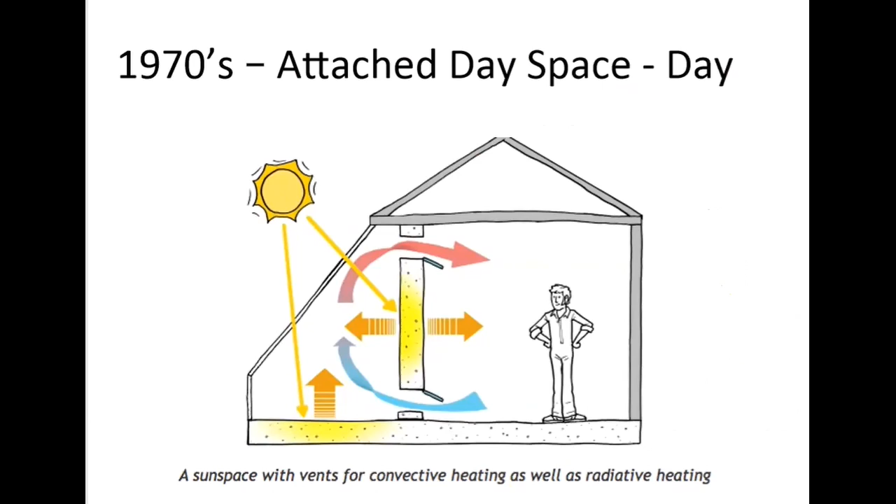One was this attached day space, commonly known as a sunroom, and this was an idea that came out of the 70s. I don't know how many people have seen this. You heat up a space during the day, and then at night, this heat that you collect in the wall radiates throughout the house.

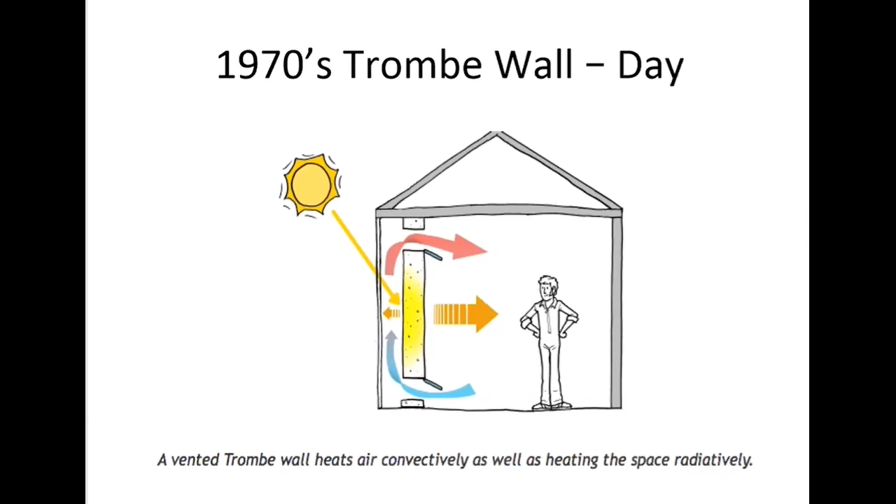We're going to be facing to the south. We're going to be berming as we can. Unfortunately, our site is reversed, but we've done a lot of work.

Putting the deciduous trees on the south, smaller north windows. One principle used very often is to have dark floors, like black slate. So when the sunlight comes in, it radiates and the heat is collected on the floor, and then you close the windows. I had one house that didn't even need heat at night—we collected so much energy in the floor and moved the air through the space. Another house we did in the Caribbean required no heating or air conditioning, all natural, but that's the Caribbean.

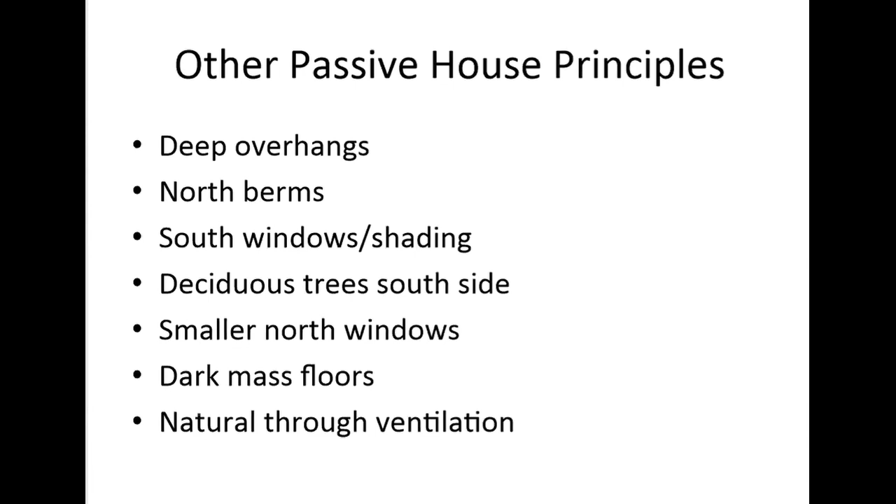So I'm moving quickly into the 21st century passive house. Compliments of Richard Pedranti—these are your five principles.

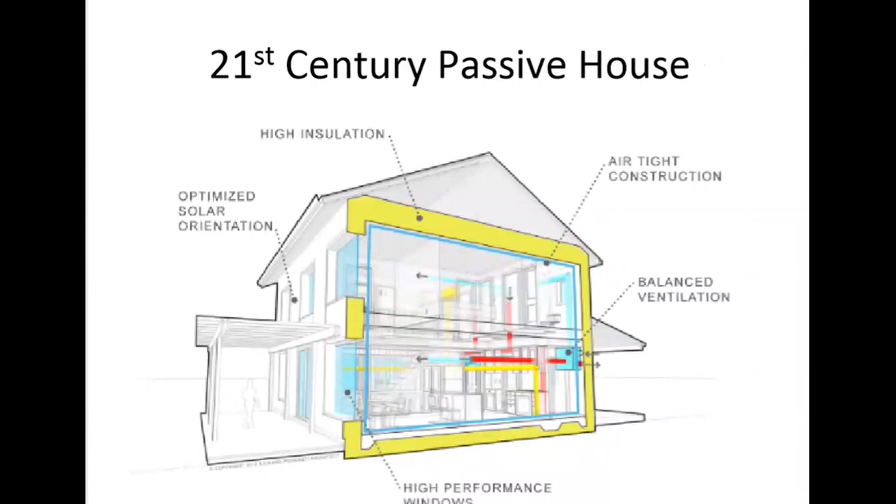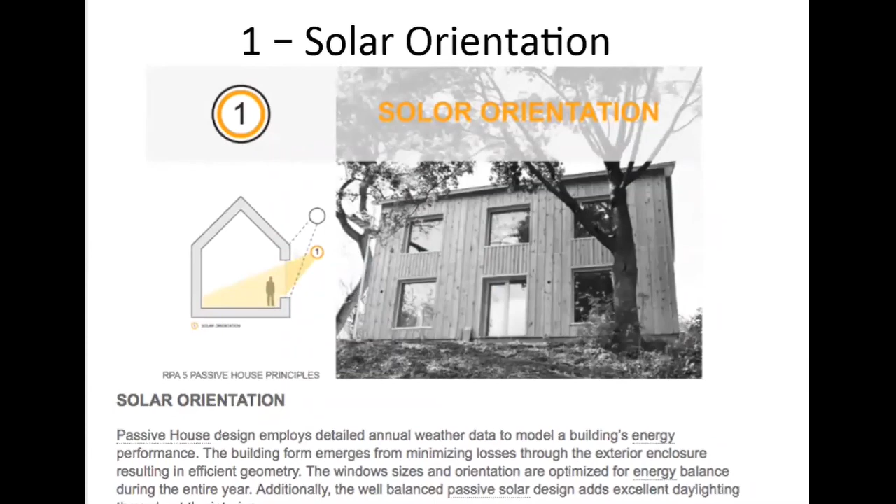Jane, this is Passive House 101. You asked here—the first principle is what we just talked about, to orient the house properly so it maximizes the amount of sun coming in.

The second is to have incredible amounts of insulation. I'm not going to go into detail, but everything we're doing in this slideshow and elsewhere far exceeds what's in the code.

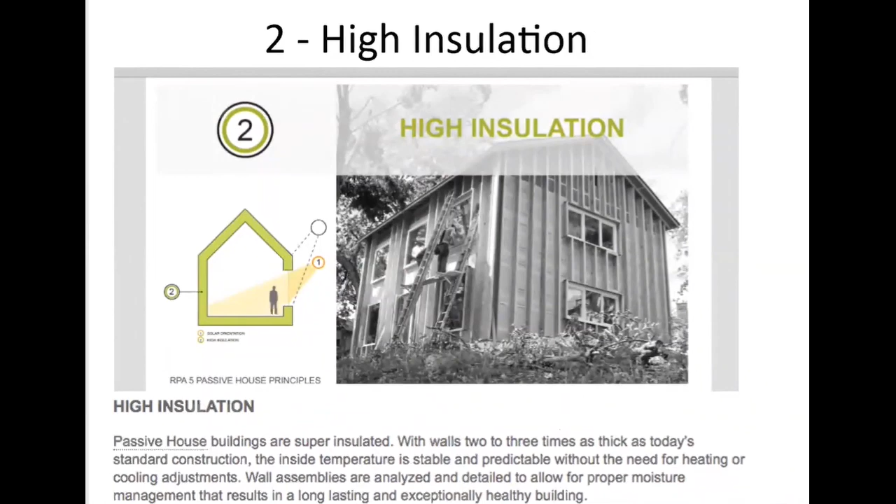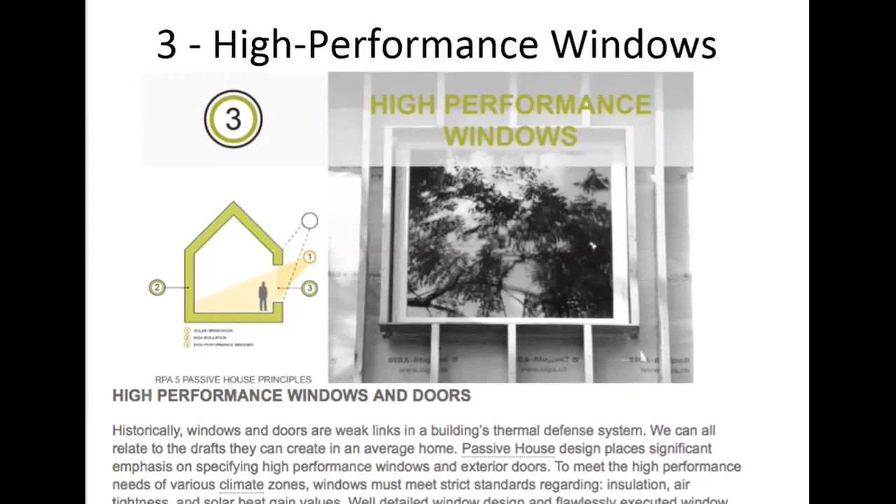We also have a great deal to talk about with windows, and we're basically talking about using a high quality triple glazed window. I'm designing a warehouse now where we have single pane industrial windows, and even putting a double pane insert does not come up to the energy code required now by code. So that's a tough one.

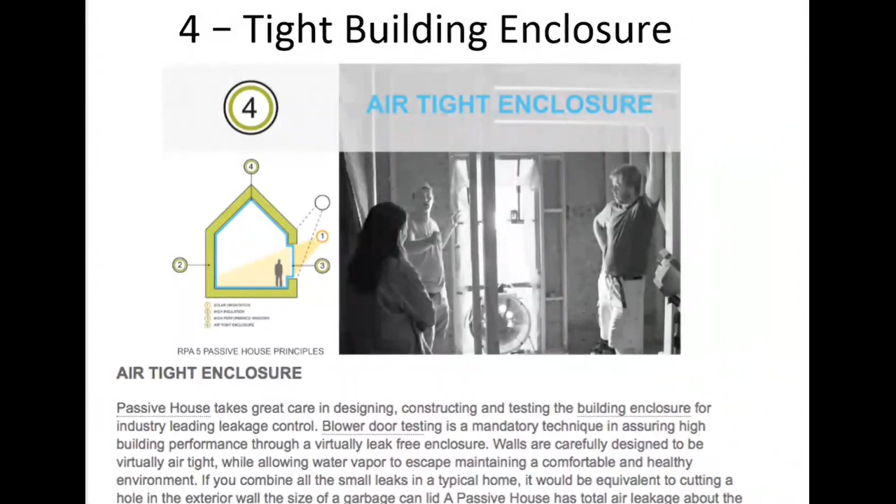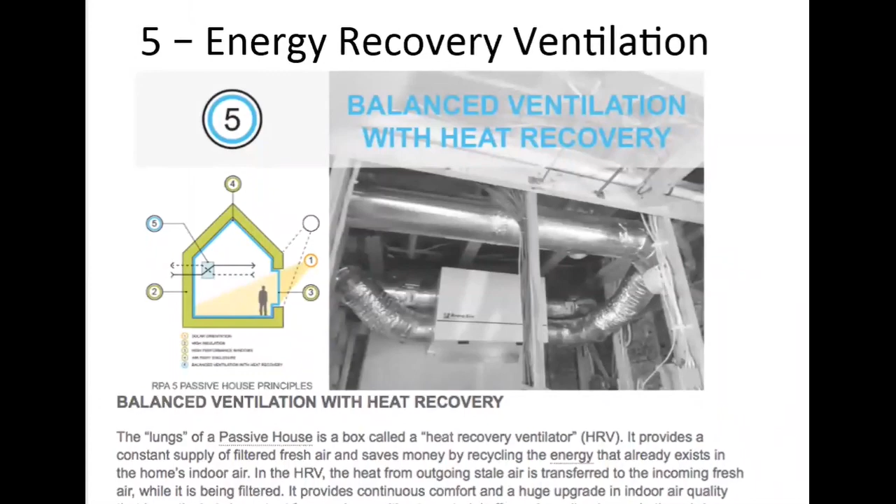And here's the last one, which is the mechanical, and we're going to go into a lot more detail about that. This is where the real energy modeling comes in—very efficient and small ventilation, recovering the heat.

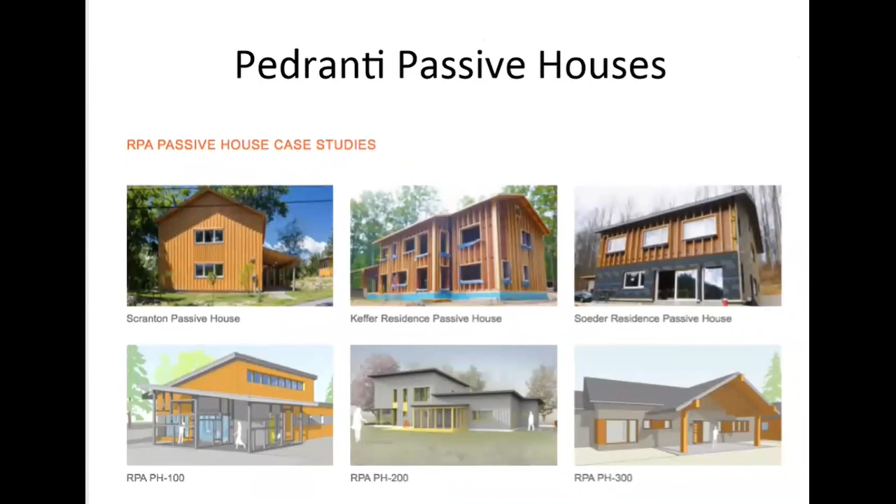These are all passive houses. They're all single family. We're going to be looking at some other models here.

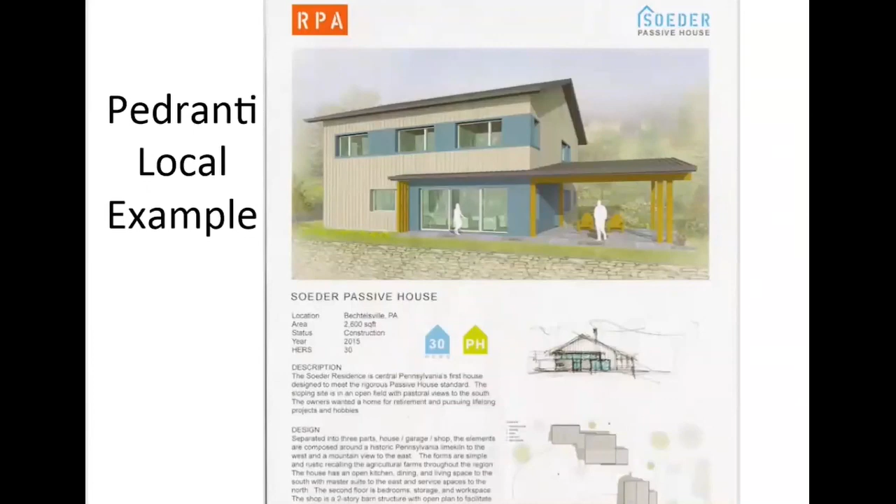This is one we visited nearby along Route 100. It was under construction, but you really got a feel for it. How many people remember this house? Jonathan remembers, Sue remembers, yeah.

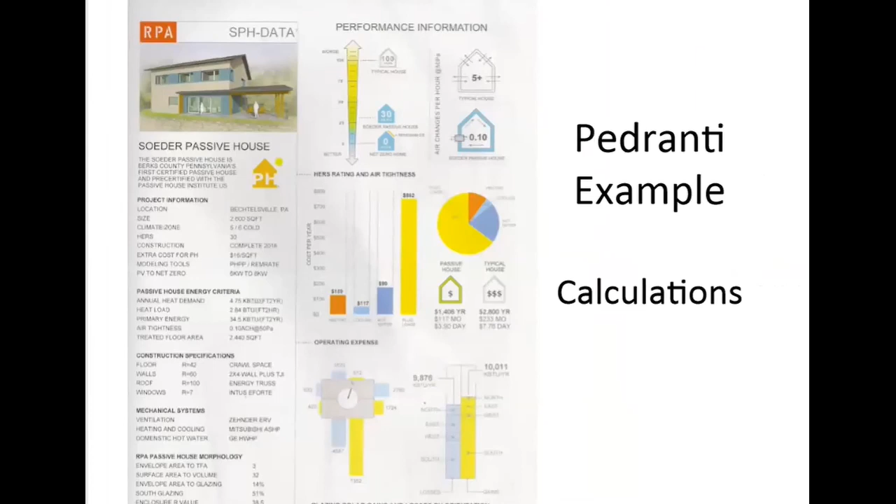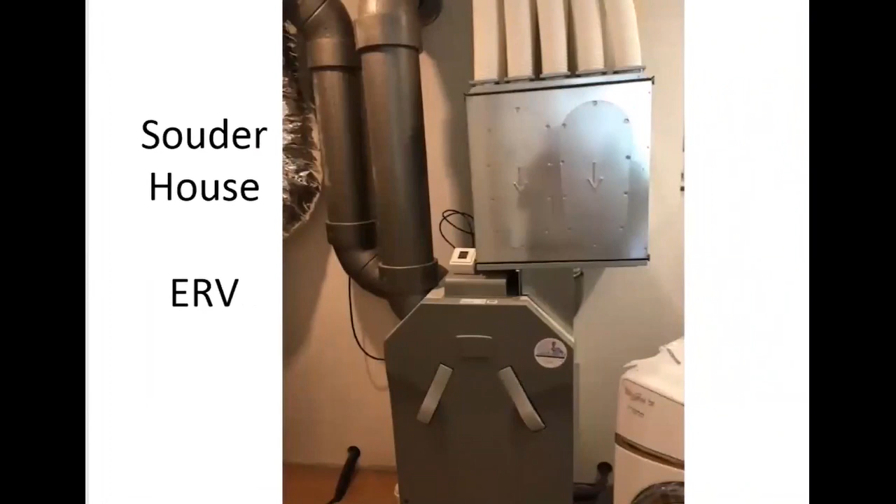Richard does his modeling and shows the performance. These walls were 10 inches of insulation thick. Here's the water heater, here's the ERV, a very small mini split—one head upstairs, one downstairs. The space felt livable and nice, but quite frankly it was kind of overkill in terms of the energy modeling and more expensive than we needed. That was our conclusion.

I won't go into detail, but this shows how the envelope is controlled—you see the pink line here, that's the important line, the air vapor barrier control layer. This is a design where the insulation is used as formwork. There are a lot of different variations of this. This is something people have studied a great deal, and this is the secret to the passive house—these edge details. Otherwise you lose everything.

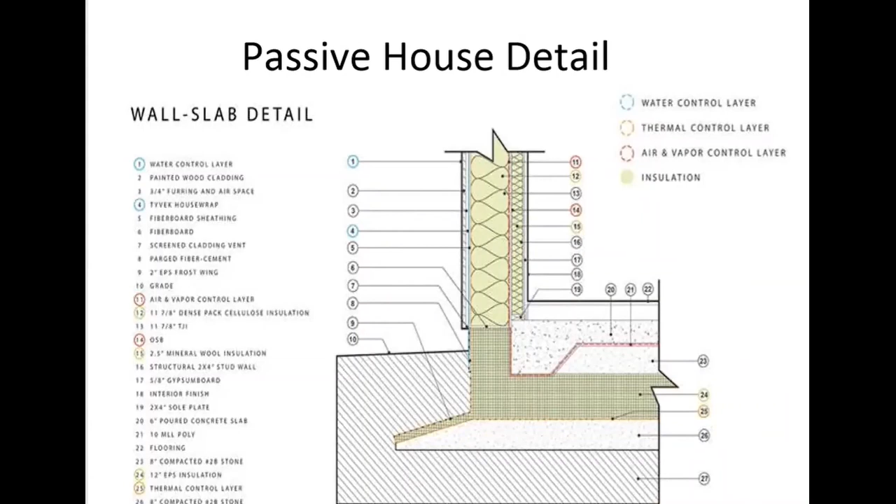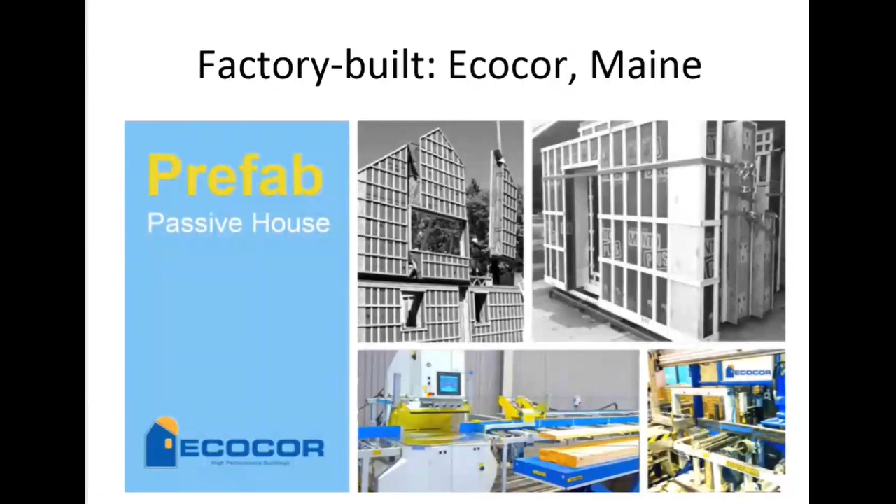Here's some models from around the world. This is the main factory where the Belfast was produced. The people involved with the co-housing also built other passive houses. It's a panelized system, as you can see, and they did invest in the factory.

Jonathan and one of our civil engineers visited this plant and can do a more thorough report. The Build Smart system is very much in use around here, and it's the one that we've been looking at. In fact, there's a project only about 10 miles from us, the Whitehall community.

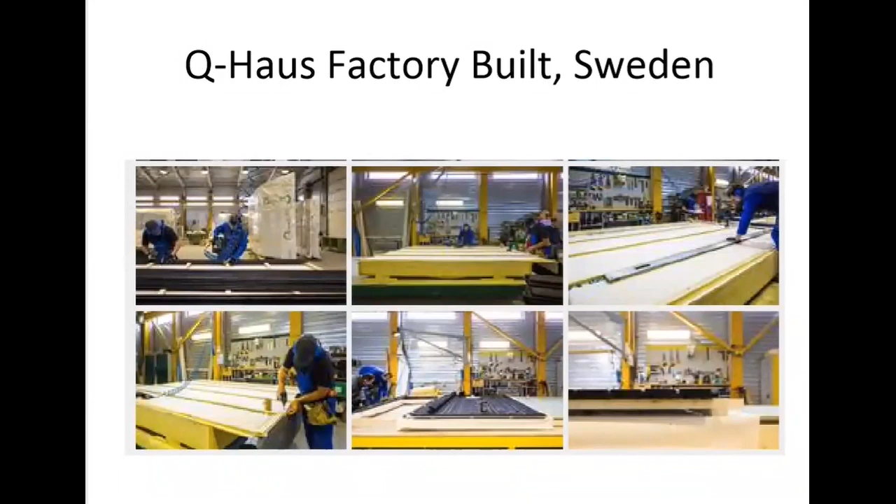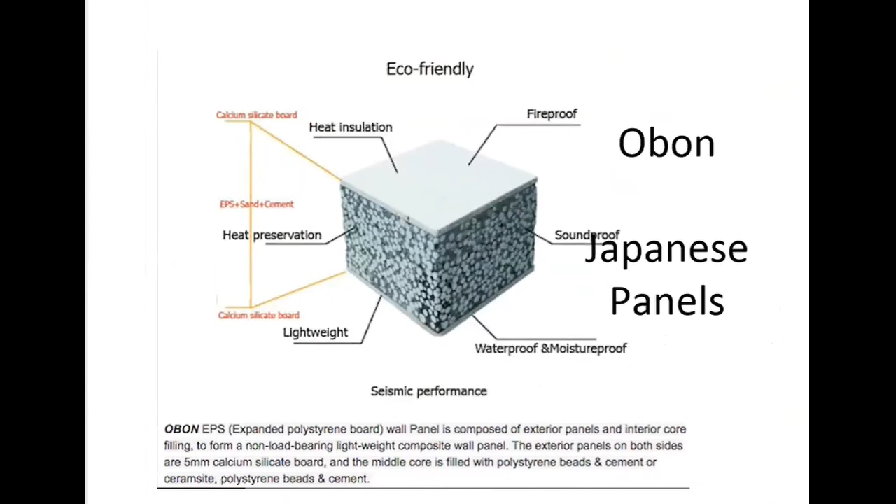This is, I love it—this is so cute, the Japanese model here. This is all prefabricated, and they use a system with this polystyrene. When we get to Holzraum you'll see that we're now going to be going to—it says eco-friendly, but we can do better than this. Right, guys? That's true. Yep, okay.

Here's what I'm not talking about today.

Jeremy Rifkin was our keynote speaker. He wrote a book called The Green New Deal, an urgent plan to confront climate change, transform the American economy, and create a green post-fossil fuel culture. Jane, does that sound familiar? That's what Jeremy Rifkin is doing on an international scale. He is an absolutely incredible speaker.

We must read it, it set the tone. This is not Bernie Sanders' New Deal, this is Jeremy Rifkin's Green Deal, which is much more expansive. I went there to see the aesthetics and the design, and I came away with some examples, which I'll show you.

We have to talk about marketing the passive house. This is huge, you know. People don't know what it is. Why should they spend more? What are the advantages, disadvantages? This is what you're going to be addressing shortly.

There's going to be a lot of technical stuff, we're going to lose you guys. You're going to engineer us all over with the Holzraum system. I won't go into that right now. And Ilka is a specialist on the glazing innovations.

Boy, what a big topic this is. Air quality, this is the main reason to do passive house, and there are lots of studies on that. And then environmentally friendly materials is something that our members asked for 3 years ago. They were scared of the Build Smart system. I think we're answering it now.

It looks a little like suburbia with single-family houses. We do have some twins and so on in this model, but this was praised for its efficiency and so on.

Here's a modern contemporary house. This kind of architecture was simply not available 3 years ago. We didn't see any passive houses that looked this sharp or this smart. And take a look at this one, this is a wonderful single-family house.

This is cute, the bicycle house. These houses are designed to be put sort of anywhere, which, Ilka, that goes against my grain as an architect. I always spend a lot of time with the site before I plop down a passive house, just, you know.

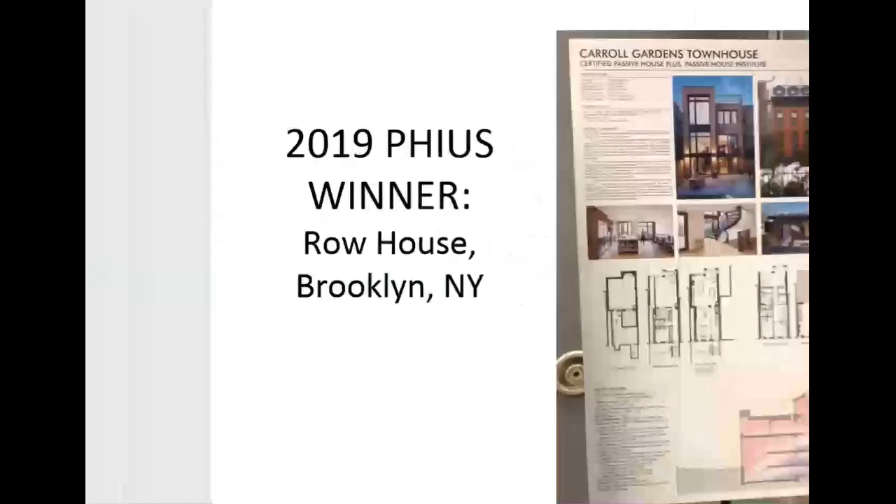Here's a townhouse, this is actually sandwiched in between fairly traditional housing. You might question the architecture, therefore. I've seen better integration of the old and the new, but they didn't have to. This apparently was not in a historic district or whatever. These are all certified passive houses. We have models in Philadelphia that we can go see as well.

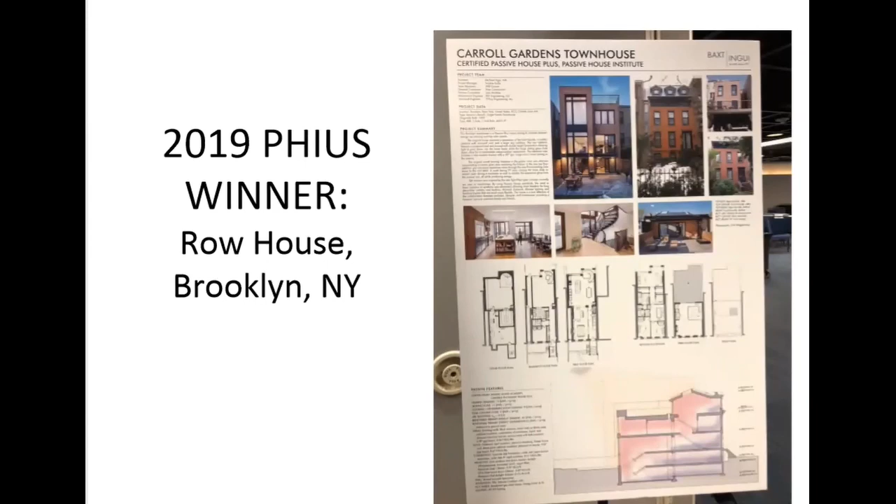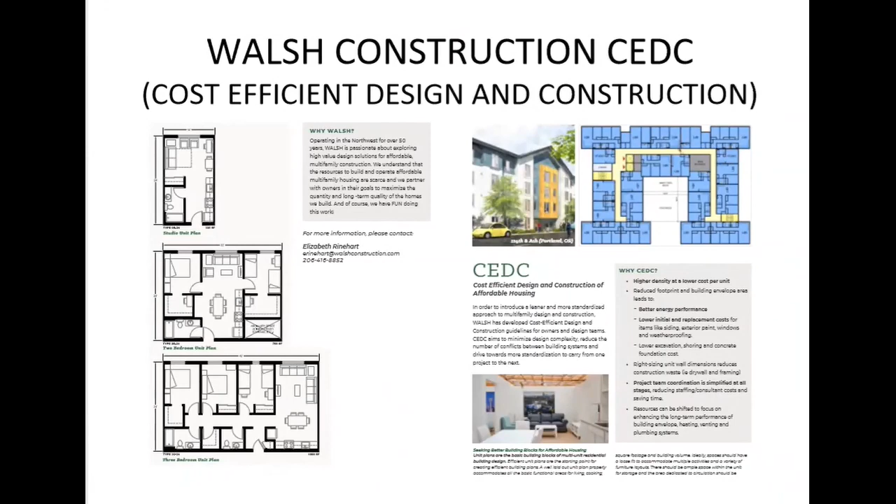Okay, this is the cost-efficient design, and I don't want to spend a lot of time on it, but there was a study that he did that he showed. This was one of the big talks in the big auditorium.

You take a typical unit and you see where you can maximize it. So he's got the typical plan and optimized plan. This is the kind of study that we need to do in our co-housing to max out our unit design. There are dozens and dozens of unit designs, but just by doing some of this optimization study, I believe we can go a long way to bringing the cost down and improving the design and the use of the space.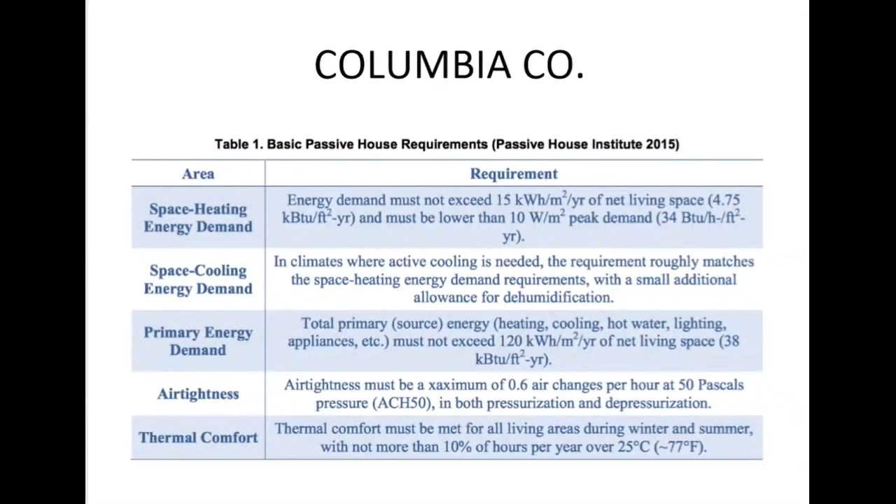We're going to be looking at the various demands and the importance of comfort. Passive house should be able to be at 50 degrees year-round with no heating or cooling brought in. Maybe that's improved now, I'm not sure, but here are the, now we're using HERS. This is another one, Zero Energy Ready Home.

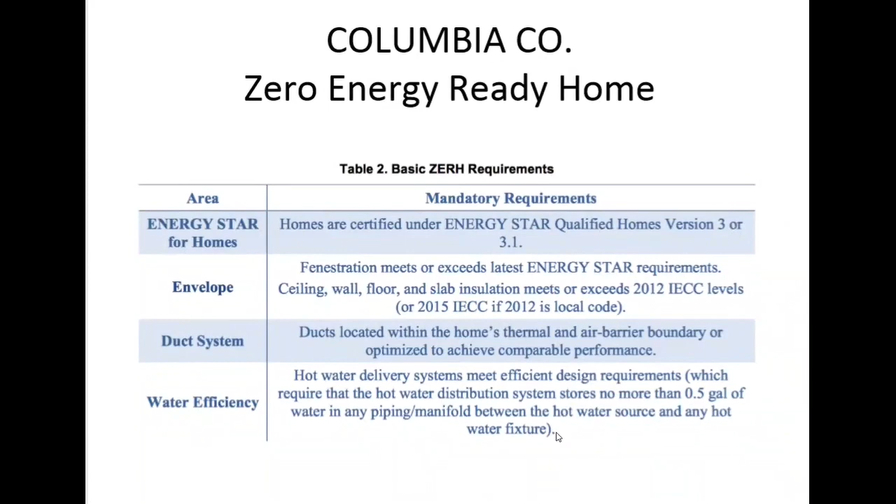This is 5 years ago. And here are some of the efficiencies that they put in their requirements. And these are some of the things that we're putting in our ordinance, okay? Here's some more. Indoor air quality is huge.

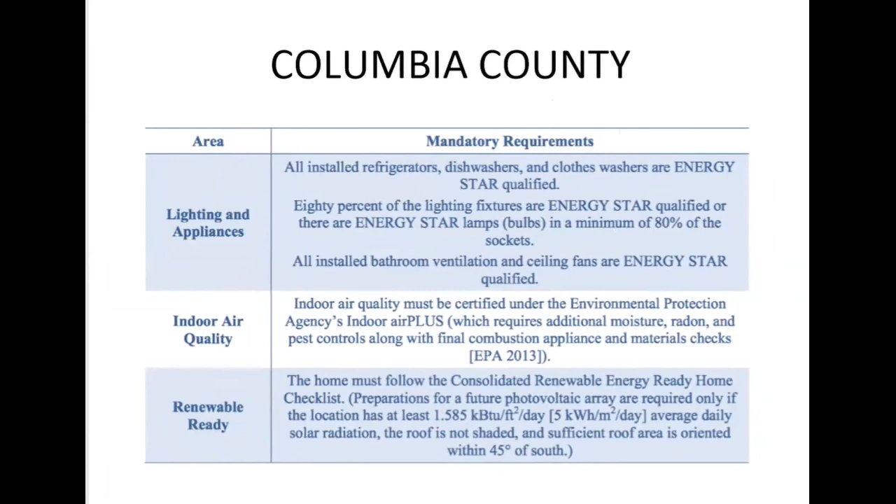So what we see in our kind of zone here is more probably around R36 for the walls, and then pretty much code, an R49 for the roof, and then probably 4 to 6 inches of under-slab insulation. So it's not too crazy. This is definitely very different from what we're looking at there right now.

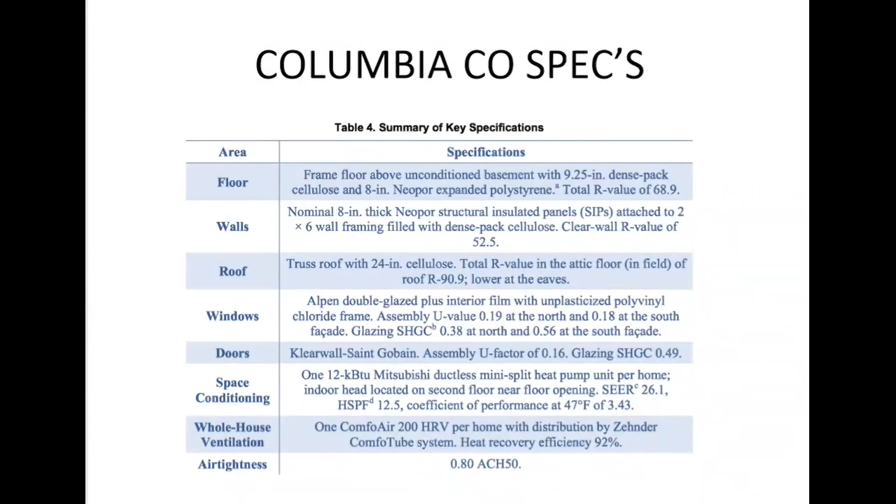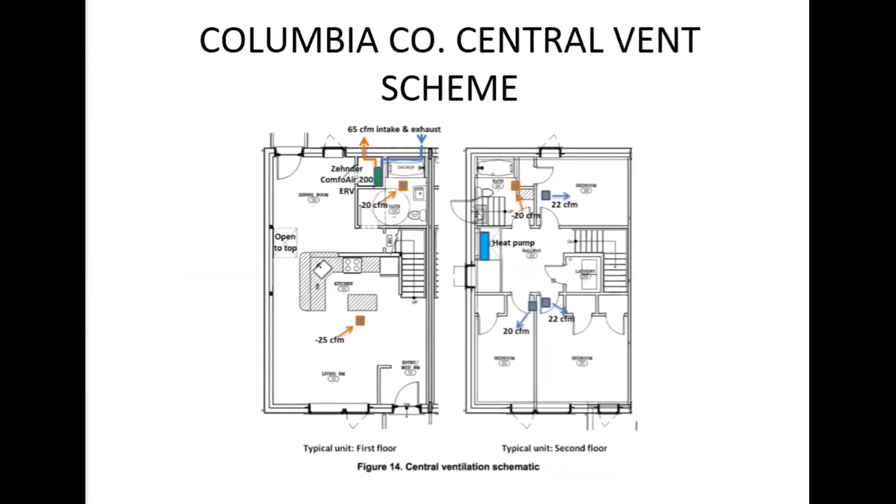But this shows the central design where you have a small amount of air being delivered into each space. And then you have the exhaust from the bathroom - they don't show the kitchen here, but basically your typical setup. This is called the central vent scheme, and they compared it with what's called the point source.

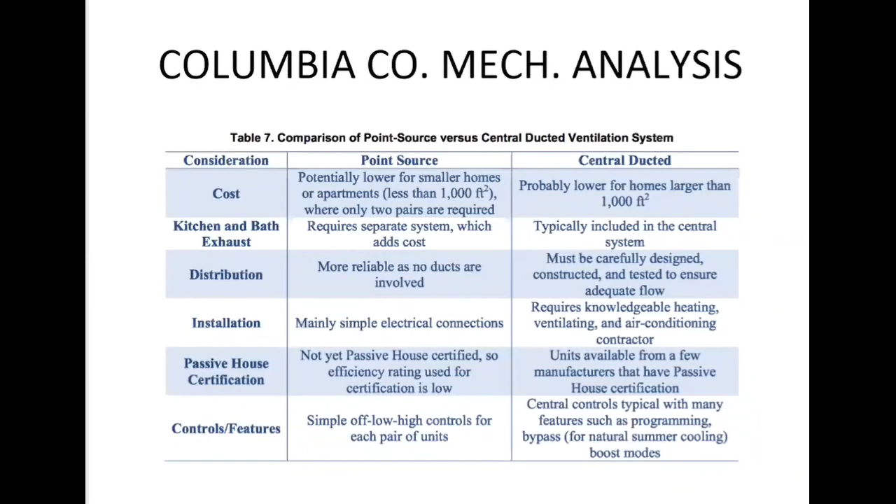And this shows, you know, ventilation through wall. And they compared these two. Very interesting, the point source versus the central. They compared it in terms of efficiency and cost and so on and so forth.

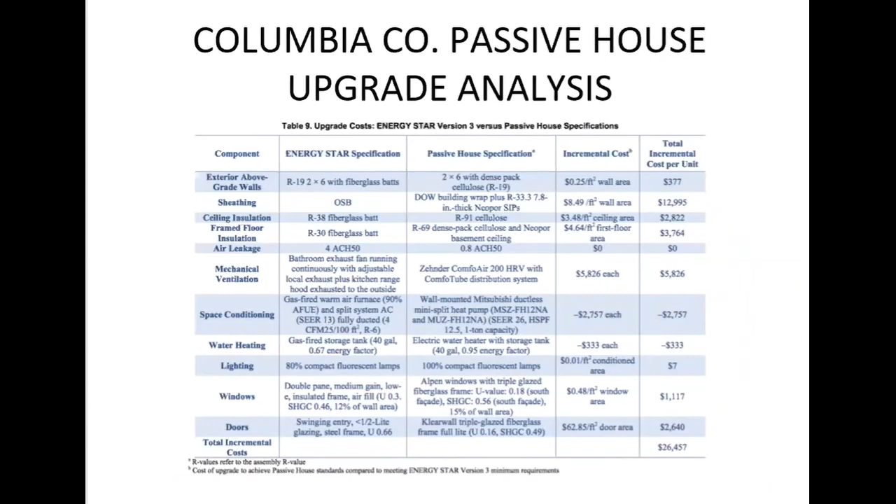This is extremely valuable. This is 5 years old - I know, it's 5 years out of date - but I'm showing this to indicate the kind of information we're going to need to make intelligent decisions.

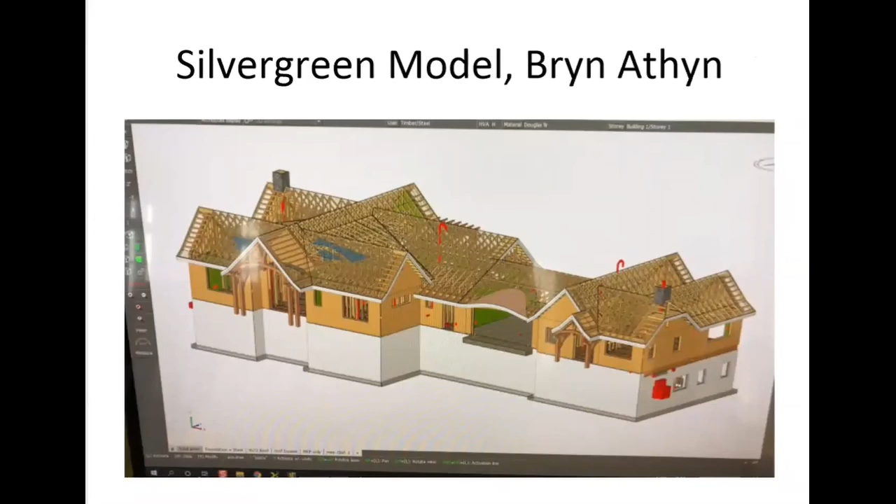I don't think I should spend any time on your Silvergreen. You have better slides of your floor plans, right? Here's the foundation, and that's the only foam I saw in the whole place.

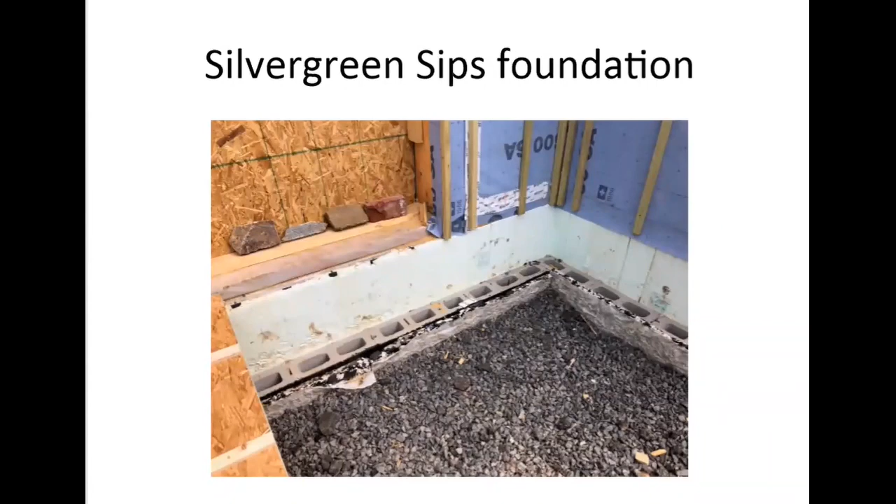You might address this. It's nowhere near the residence or the air quality, so it's okay in that application, correct? Well, there is foam in - we are working to try to find strategies to get all of the foam out. It's a challenge downstairs in that house.

Eventually there will be some residential space that is surrounded by the foam, and that's unfortunate, but right now we just don't have a strategy. Yeah, down in the basement, and the caretakers.

Okay, we met Shannon. She joined Revision, and this is a wonderful presentation. She was having another group coming in, so she spent a lot of time setting up, and we were fortunate to see the whole thing.

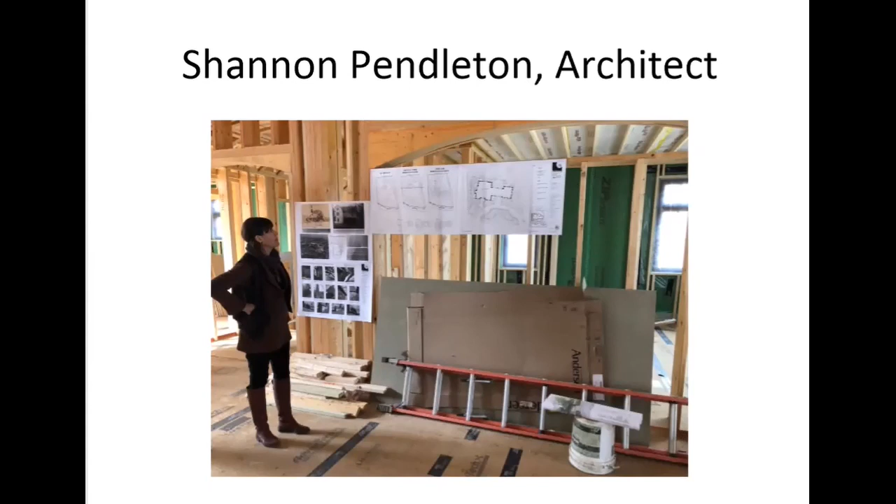You didn't bring the mock-up because you're not here, but talk about that. This is cool - this is what we saw down in Washington, and Jonathan pulled me over and said, 'Hey, look at this.' And I said, 'Oh wow, well, here we are.'

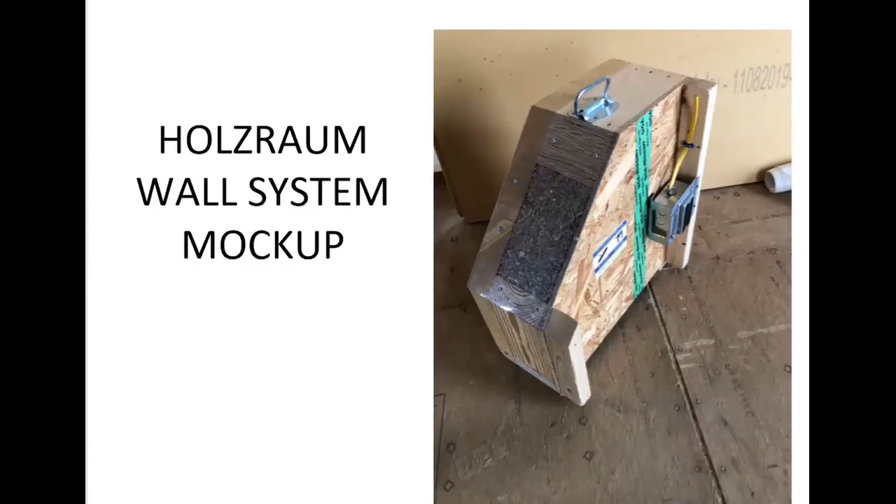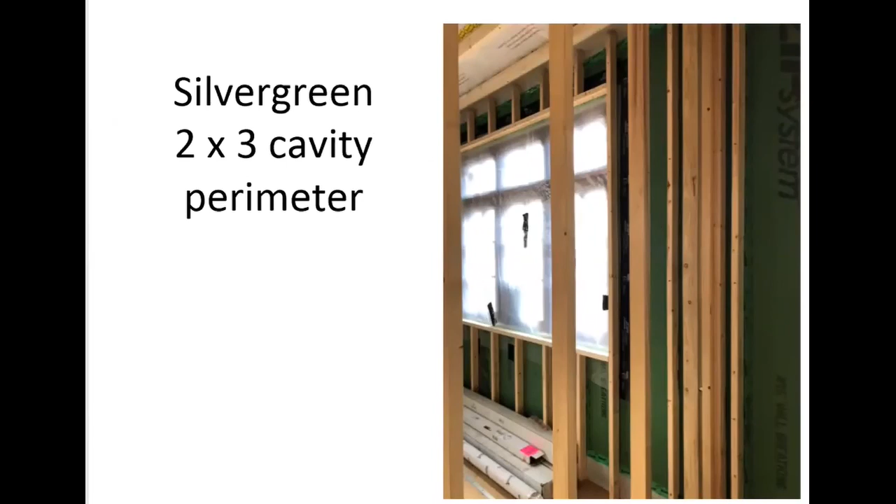Now this shows you the cavity perimeter. This is different from the BuildSmart system. The BuildSmart system has the studs integrated, and this is another layer, okay?

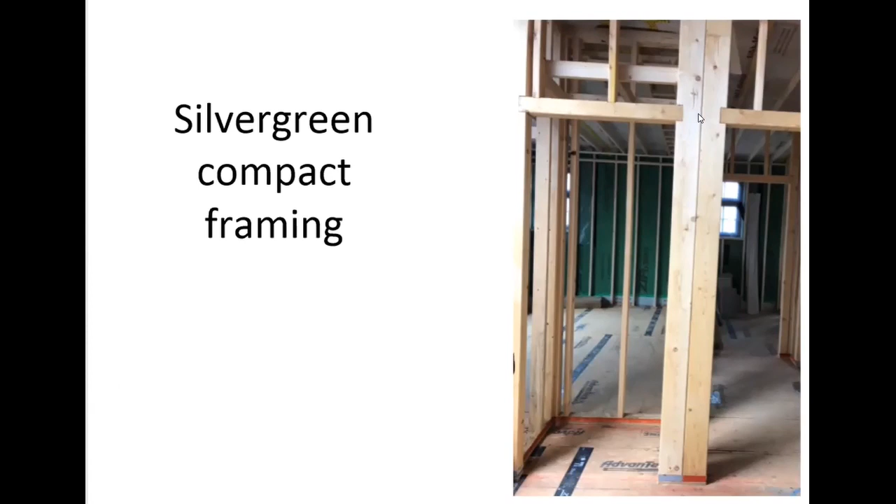I'm telling you, as a carpenter for many years, the quality of the lumber and the joinery, Steve, my God, this is unbelievable, you guys. It won us over pretty quickly the first time we saw it as well. And the quality, the lumber actually is of a ridiculous quality.

It's imported, and it actually has a lower carbon footprint because it's container shipped. What's great is that most fabricators using North American wood aren't using FSC stewardship certified lumber, but all the lumber that comes through Blueprint is PEFC certified, and now they can do FSC too. So that's nice, though we're throwing a lot of acronyms at our group here.

Now, I was there when those guys downstairs were working with the windows. I never actually saw one installed, but this is key, and the difference between the BuildSmart and the Holzraum is that the windows are installed in the field, and I'd like you to address that as well.

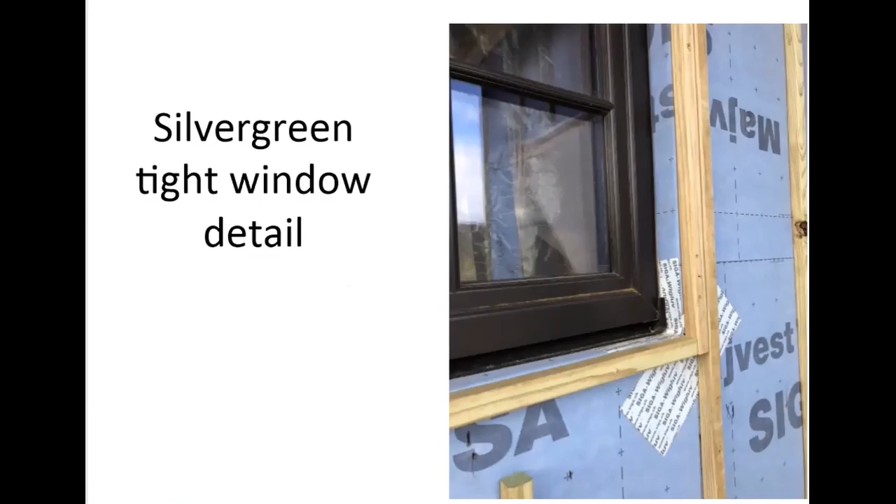And then this is the downstairs you were talking about, and these are 2x on the flat. You can't see it very well, but there are little notches behind each one of these studs for the electrician. And if you look upstairs at the framing that I showed earlier, there are holes drilled, pre-drilled, so you don't have an electrician going around with a big right angle auger struggling with this. All of the electric, with pancake boxes and so on. Anyway, I'm going to turn this over to you guys.

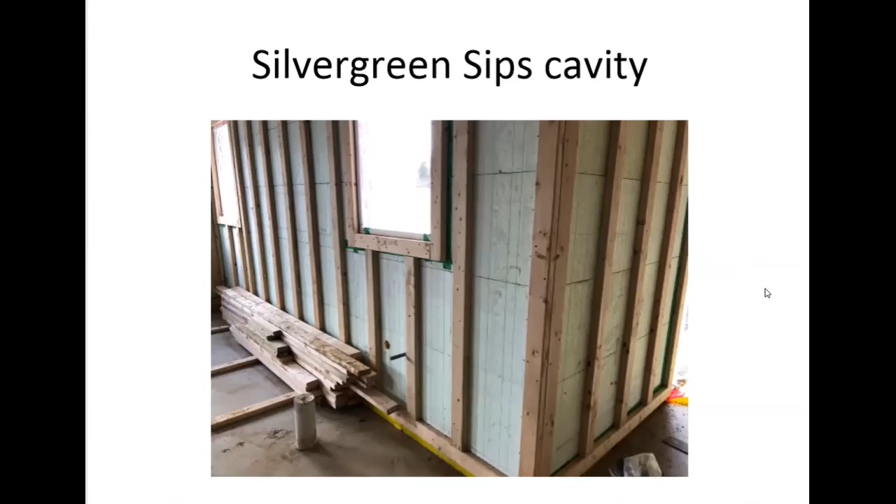We're Steve Hessler and Ilka Cassidy, and we started Holzraum System a little bit over a year ago. I'm also an architect. I founded C2 Architecture, and I actually went to school in Germany, and that's where I heard about Passive House for the first time. Then I moved here, went to the University of Washington in Seattle as an exchange student, ended up working there a little bit, and then years later I became a certified Passive House consultant, and that's been my passion ever since.

Steve, do you want to say something about yourself? Yeah, my name is Steve Hessler, and I did a restoration carpentry apprenticeship after Penn State years ago, so I've been in the wood business. I got into designing heavy timber structures and got picked up by a company that was one of the first - we had the first 5-axis CNC machine in the country, about 20 to 25 years ago. Eventually I ended up running that design company, and I've been involved in structural wooden buildings and other parts of the building, all around wood and different fabrication techniques. So I came from rebuilding old things with hand planes to moving into state-of-the-art CNC fabrication - that's where I like to be. Now Ilka and I started working together on high performance and passive houses, and that's when we came up with some of these options we're going to tell you about.

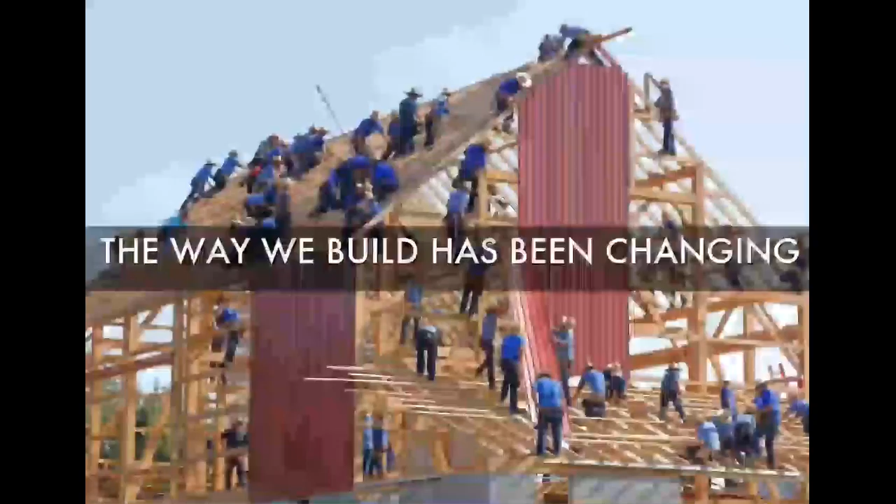So this is bringing new opportunities. We know that by now the awareness is definitely rising. The building codes are slowly changing. We're at 2015 for residential, 2018 for commercial in Philadelphia, which is gonna change things drastically, and it changes the relationship to Passive House as well, because not too long ago Philadelphia was still using the 2009 code, so the gap between a code home and a Passive House was pretty big in terms of energy savings, but also in terms of cost. Now what's happening is that the building codes kind of catch up.

And I think in California, the building code is almost at a higher level than Passive House, which is interesting. This means that people are just getting more used to building tighter homes, just air tightness. I don't think anybody had really heard about that not too long ago, and now it's definitely a big topic. Mechanical ventilation, things like that. So it's good for us because it's not as crazy—people don't think it's as crazy when we start talking about these things because they've heard of it.

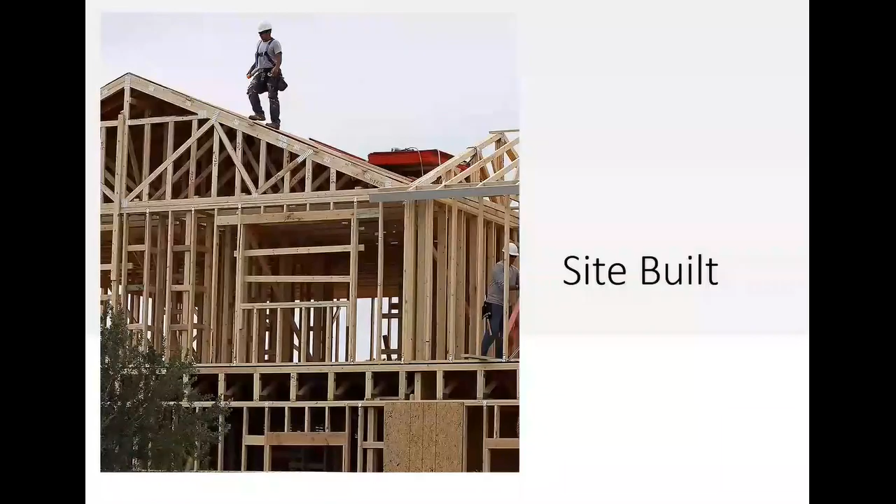So we just wanted to go through those three different kind of solutions that we found. The first one is the site build. Keep in mind, these are three solutions that we've had at least one or several experiences with at this point. But these are only because Ilka and I only build high performance and passive houses, so everything I say about these doesn't really apply to a code compliant build. When it says site built, that means a site built pretty much passive house.

We've built certified passive houses site built. We've also built a good handful of very close or very high performing site built homes. And we've also built a number of SIP homes further back in our building history, and in my experience those were tight homes, lots of foam, lots of moisture risk. Some of it has become famous, but even some that's not famous, I know for a fact I've talked to some clients from a few companies I've worked with that have had some pretty stale buildings that were very energy efficient because you put SIP on a building and tape it and it is quite tight. But we didn't have ERVs, so we didn't have constant mechanical ventilation with heat exchange.

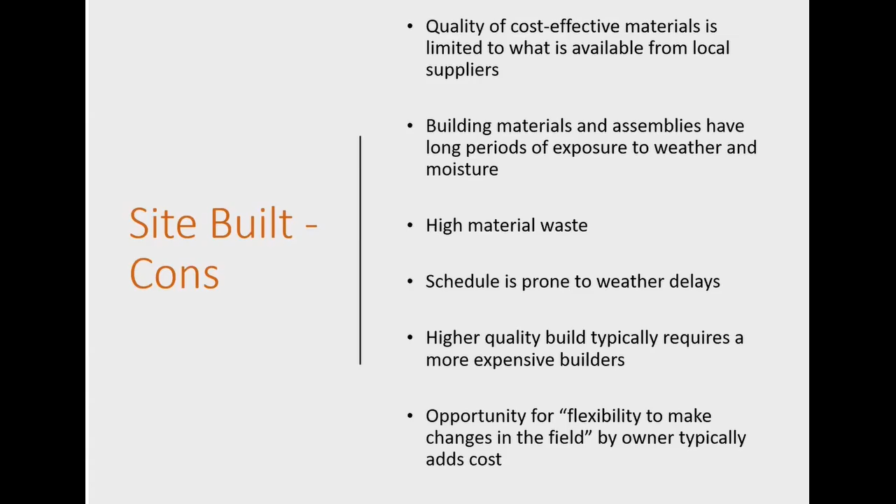Next, this takes us to our next building type, which is Lego parts. And the Lego parts that we have had experience with are not just the Build Smart panels that did have windows that come in them. And Joel, you mentioned earlier about Holzraum System.

All of our windows are installed in the factory. You were looking at a picture of the ICF foundation, the concrete foundation. Oh, and those windows, Blueprint Robotics, they actually came and installed those windows for us in the field. But all of the windows, unless they're gigantic, are all very well installed in the factory.

It's one of the things we like about the system, it's a really nice window installation. So Lego parts that we've experienced are wall panels with windows installed and exterior insulation. But then we basically are also filling in with maybe a bit of site built, maybe floor framing and sheathing, but then we'll bring in trusses, roof trusses. So a Lego home is sort of like integrated off-site manufactured pieces that you have to put together.

And that actually works quite well in the non-passive house world, as you see it all over, right? You see the multifamilies going up, they bring in the walls and they may have the sheathing on them. Everything is moving towards that panelized, but the difference between a code compliant panelized home and a passive house is the control layers. So the control layers are not something that a code compliant builder really needs to think about, but the control layers, which are air, water, and thermal, are the part that make passive house difficult.

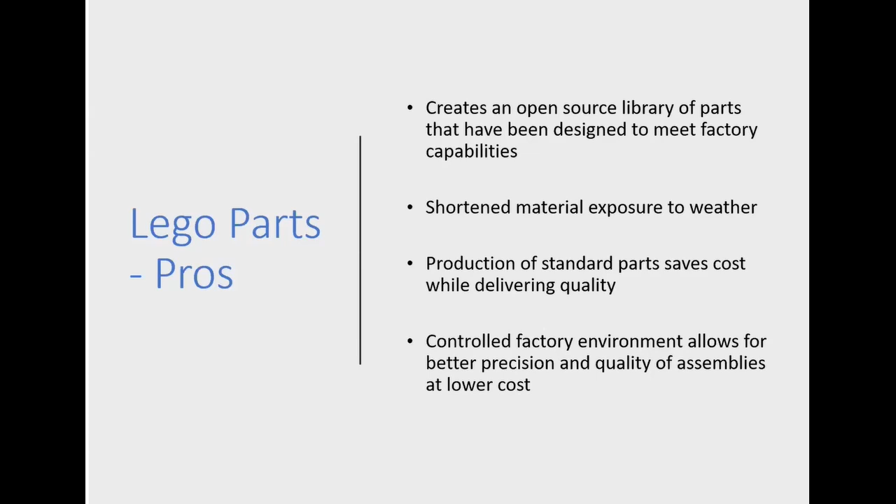As soon as you moved away from it in size, the price went up. And then as soon as you moved away from it in color on the inside or outside, the price moved up. If you needed a couple little wall thicknesses that were different or different height, it really drove the price up. And then all of a sudden we were kind of like, well, what are we saving by the Lego parts all of a sudden? But I want to say we still really enjoyed those walls coming in with the windows. I mean, it is for a passive house, it's pretty critical, I think.

Steve, excuse me for interrupting, but I mean, we are talking about 30 townhomes here. Yes. So when you use the word custom, I think that may not apply. That's true, that's true. If they're all going to be the same, if they're all going to be the same layout, right? Which they are.

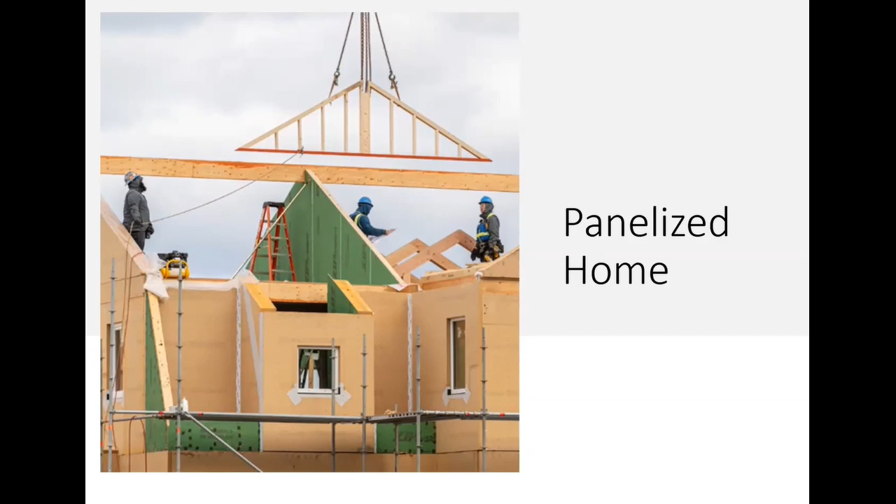So the next style is a panelized home, which in our case means the entire system is integrated. What's great is that when we did our first one with Blueprint Robotics in Baltimore, Maryland, and brought them our wood fiber, foam-free assemblies, instead of the cost being driven down from standardization, like with a Lego part where without some level of standardization to the components you start to lose the cost savings...

What was really cool about the panelized approach is that we found standardization wasn't about the geometry of your design, it was about the details. We call them repeatable details. We standardized the wall assembly, our T and corner connections, all of our framing. They standardized in the factory how they handle a very flexible but repeatable condition. That's what's great about it.

So what happens is you don't really pay extra, as long as it's not a stupid design with a gazillion corners for no reason. You're always paying more for corners, but generally this system can achieve endless geometry. So it's very custom and doesn't tax you for customization because the savings is in the process instead of the geometry. I don't know if that makes sense.

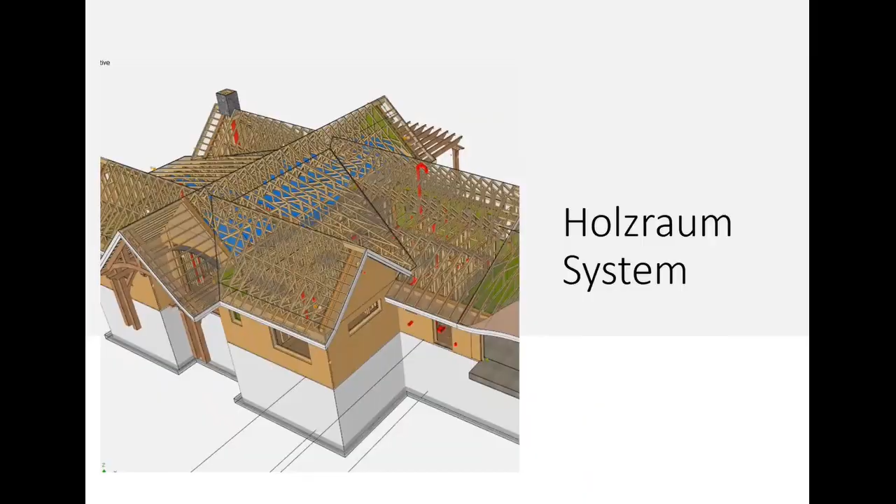But overall, we sat down and really thought about, okay, what are our ultimate goals besides all the process and how to get it done—what is the big picture here? And we came up with our ultimate goal being to make ultra low carbon, healthy and resilient buildings affordable and accessible to everyone.

That's part of offering the energy modeling and the detailing and everything, and pretty much delivering a passive house shell, because all of a sudden builders and architects that haven't invested into it can do this.

So we were looking for those puzzle pieces, and the carbon emissions, it was huge because we've been into passive house for quite a while and realized that passive house only addresses the operational carbon emissions and doesn't really give any guidelines towards embodied carbon.

The operational carbon is just kind of by being energy efficient, having good systems, having a really good envelope so that you lower your usage overall over time. But the embodied is something you decide in the beginning, and that decision becomes what it is—you'll never be able to get any of that embodied carbon back. It's kind of like you just pay for it.

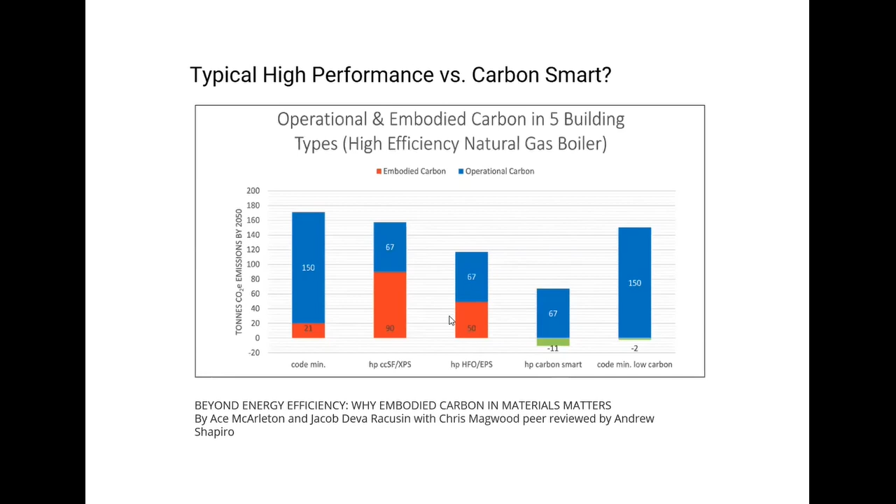So this is another one, EPS, which is quite a bit better than XPS. You're able to lower it a little bit, but you're still kind of up there. So if you go to a carbon smart building, instead of adding embodied carbon, you're actually deducting it, because all of a sudden your materials actually help sequester carbon. So this was a pretty good graph for us to get into this.

Second puzzle piece: health and building resilience. We just wanted to have a wall assembly that is really safe in terms of moisture and mold risk, which results in better air quality. And also looking towards building resiliency - how does the climate change and what does that mean for us?

For us that meant really looking into vapor-open assemblies, because you always have the opportunity to dry out rather than trapping moisture. So this is what we have been working with - we just have a 2x8 or 2x6 stud wall. Then we have wood fiber on the outside. We have structural sheathing on the inside.

So this is the big difference - our structural sheathing, typically it's on the outside. When you drive around and see those green buildings, that's the sheathing on the outside. In our buildings, it's actually on the inside. So that means this layer becomes three functions: it is the structural sheathing, it is the airtight layer, and also the vapor retarder.

Because it's fairly vapor closed, it has a perm rating of 5 for zip sheathing or OSB, we're reducing the amount of vapor that goes into the wall from the inside. And then on the outside, because we only have the wood fiber sheathing - an insulation board - it's very, very vapor open, so it can always dry out to the outside. Then to protect the air layer, we have a service cavity. And Joel, you're right, Build Smart is slightly different.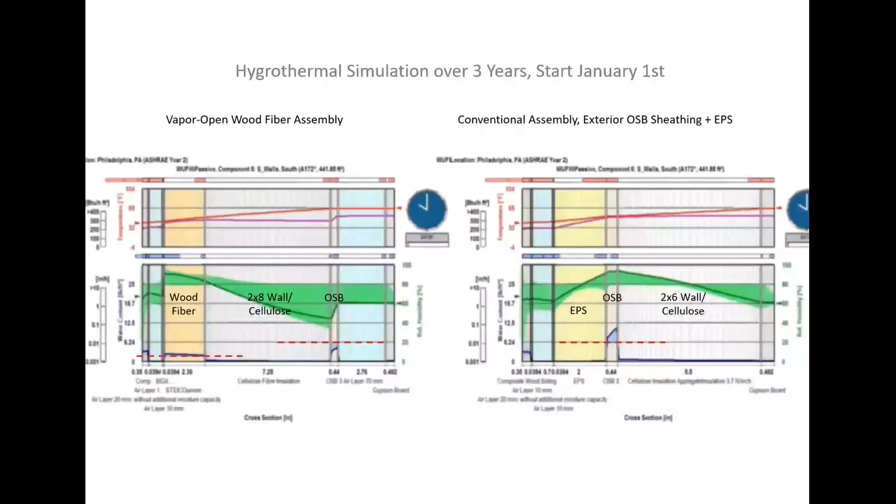So we're set with our materials, with the layering of the materials, and then we got into the offsite manufacturing part, which was the third project piece to us. And Steve, you wanted to talk about that, right?

Yeah. So we kind of figured out what we wanted to do, and we needed to figure out how we were going to get it made. We wanted to do these vapor open assemblies, and we wanted to make sure. So we found out about Blueprint Robotics around the same time - well, I guess a year or so in, when we knew we wanted to move to wooden assemblies, but we just weren't really sure how that was going to happen.

So we found out about Blueprint Robotics, and they were manufacturing, and they still do, code compliant walls for, at the time, quite a few single families. Now they're doing more multifamily. All of their single family work now, a few years later, runs through Holzraum System, and it's only high performance and passive house with our assemblies.

And they really worked with us to come up there. There's quite a German presence in their company. They actually have a U.S. design department, and then they also have a German design department. And I think the CFO is German, and there's a few other Germans. So they were very familiar with our assemblies, which are very German inspired. And so it just worked out really well. And of course, Ilka was able to go back to some of what she came up with when she was doing her degree in Germany, and it just all kind of blended. So there was a nice synergy on what they knew, what they liked, and what we wanted.

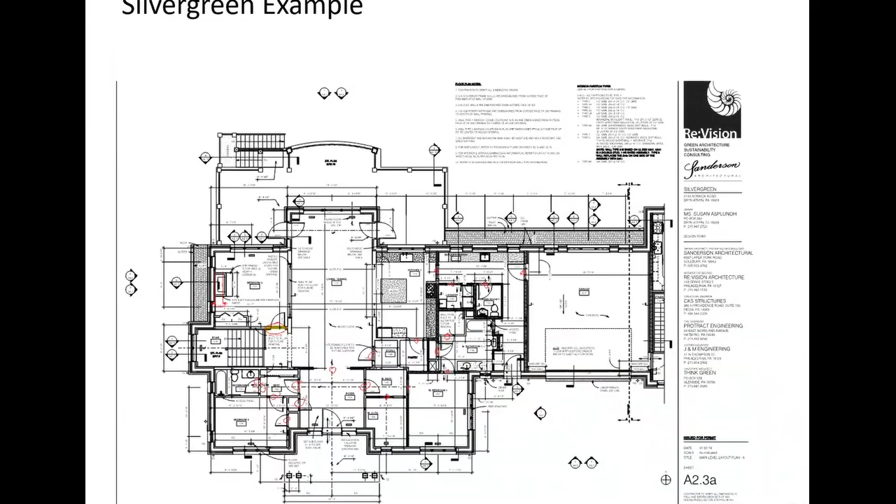So we wanted to quickly go through the Silvergreen example. This is pretty much what we get from the architects—just plans. We make the model that Steve just explained out of it, with everything in it. We even looked at this vaulted groin vault inside that needed to fit with the trusses, so we modeled all of that.

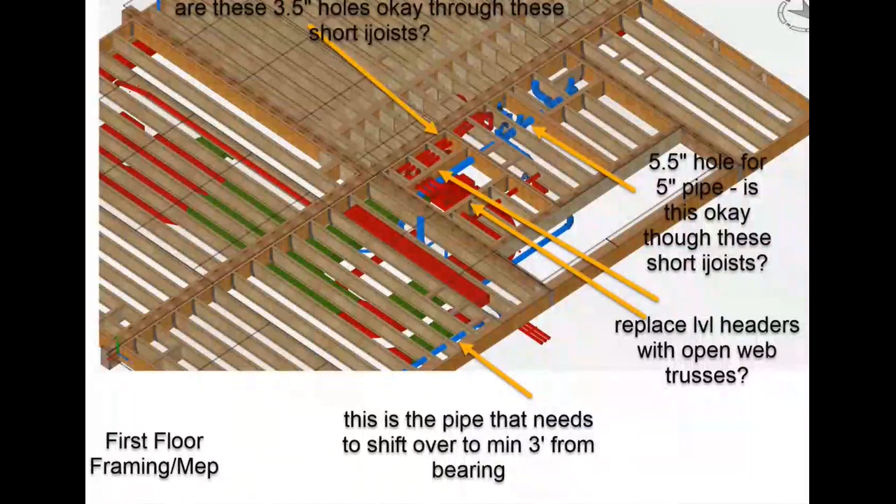This is a different project, but this is kind of how the clash detection works. We go back and say, here, we need some structural elements—can you move your pipe over there? So just making sure that everything fits.

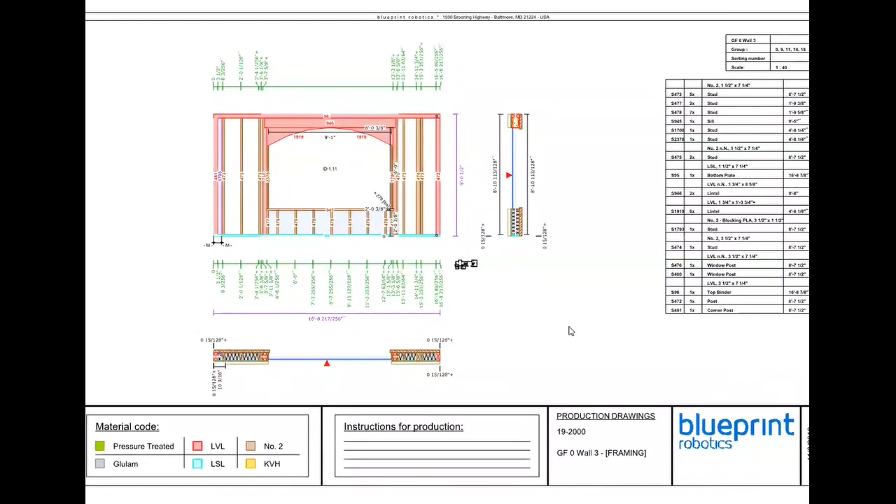Another image—this is pretty much what we generate in the program that Blueprint Robotics uses. This is where our files get generated from; these are production files. You see everything is in there. Besides the production files or drawings, there are also machine files, which get fed in one way, and the people working on these walls get these drawings, pin them to the wall, and know exactly what's needed.

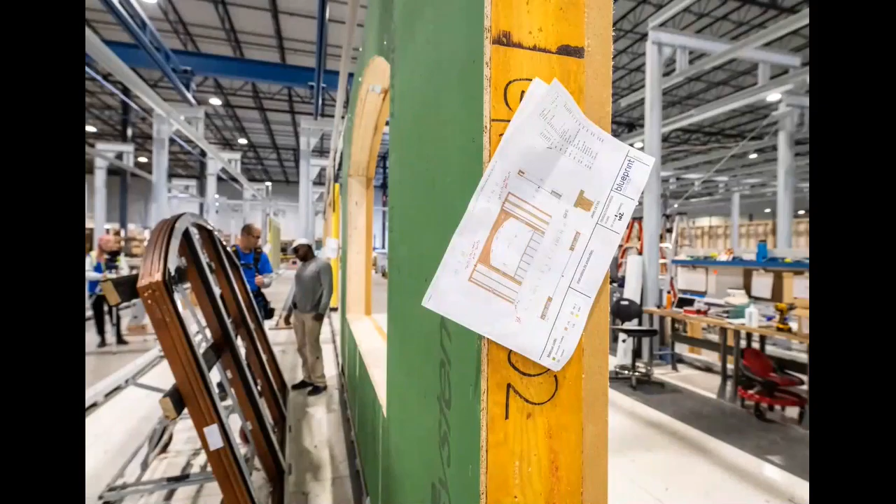Here, this shows them looking a little flustered at this giant arched window. It fit perfectly, which was great.

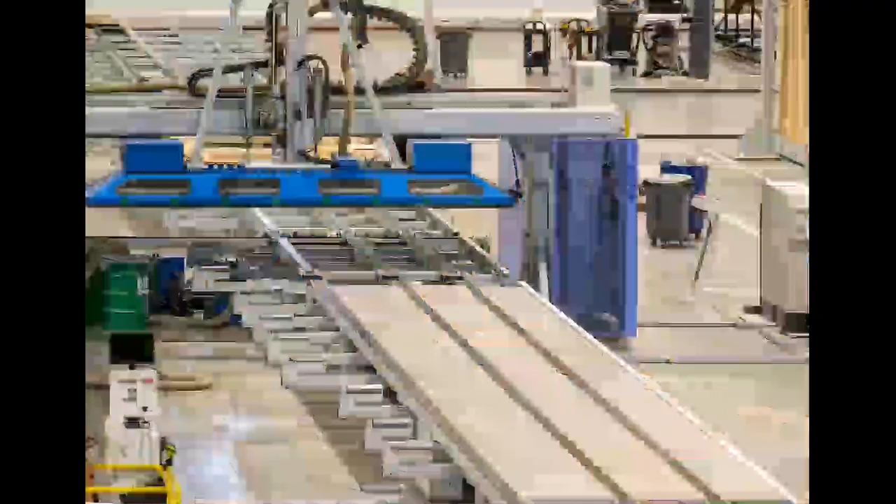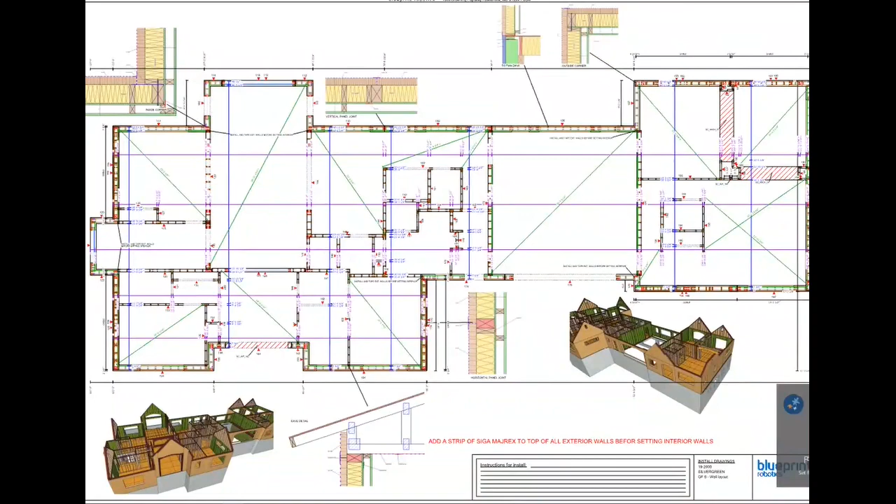This is another install drawing for the floor panels. There are numbers on the panels; they get delivered in a certain order, and the installer gets a packing list and knows what's going to come.

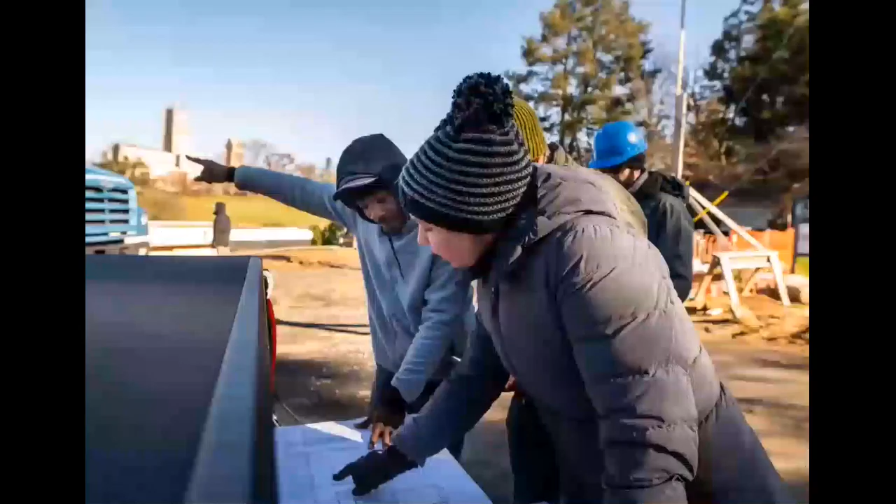And then on site, all the panels are getting delivered. Stop there—stop right there.

If you're lucky, you have a castle in your backyard. My favorite slide—that's the Bryn Athyn Cathedral, in the backyard of this home we live in. Yeah, so this site is pretty amazing.

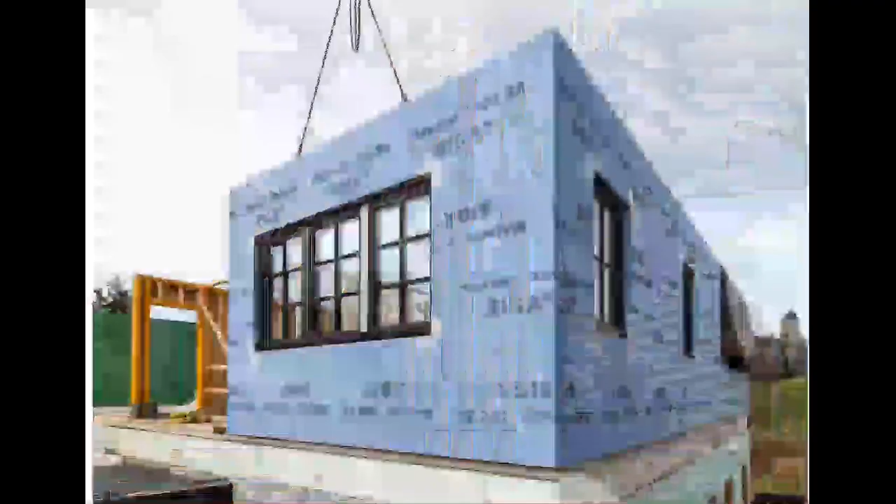So here, Joel, you see the SIGA membrane on the outside that covers the wood fiber. This is again air sealing. Because panels are going to be set on top of the wall here, you wouldn't be able to tape the wall panels where they sit up here.

So it's kind of a sequencing thing that we think through. Before the panels get set, a membrane leader has to be put down, then the panel gets set, and then the leader can get taped to the panels.

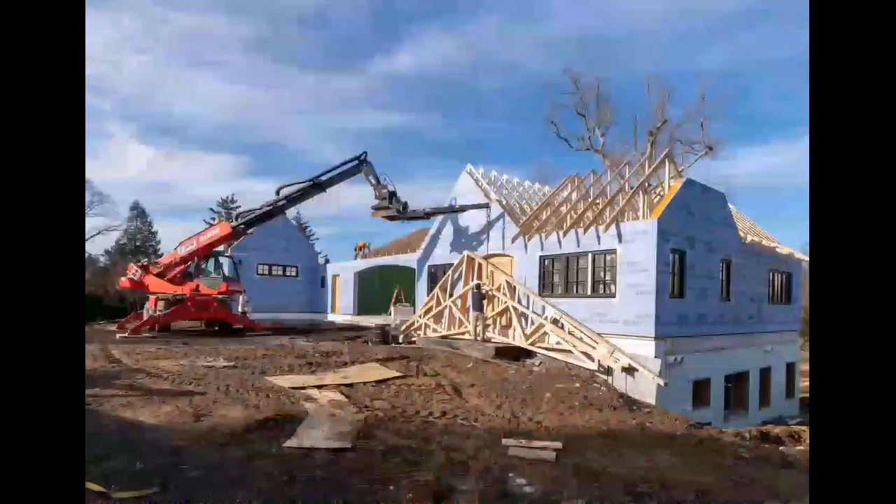Since we had the geometry and knew it was going to be built 100% like that, because that's what you feed the machines, that's the big difference—our work wouldn't be of high value for a site-built project, because you have a framer on site who still makes decisions. But since we're dealing with machines, we know they'll do exactly what we tell them to do. So if we model it that way, we can export the geometry and have these vaults and everything made.

And once they get delivered, it all fits. So that's it.

That's the last slide. One thing I wanted to mention, Joel, about the MEP: for your single-family project, Blueprint doesn't do the MEP install in the factory, but they would do it for a project that's multifamily or townhouse-like. So that's quite a big advantage for cost and time that we can talk about later down the line.